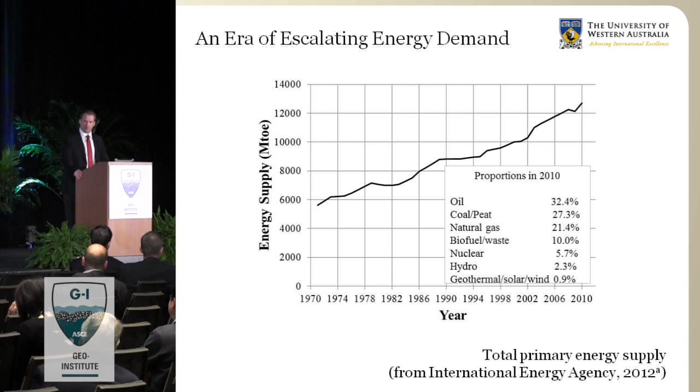So today's talk, in light of this increasing demand of energy, my co-authors and I looked at 3 areas which are changing geotechnical engineering practice. They're in ultra deep water—we're moving into, or have moved into, water depths greater than 1,000 metres for oil and gas developments, into new regions. The one I'm going to concentrate on is the one closer to my heart, around Australia and the Pacific, though the Arctic is, of course, another major development area for oil and gas.

Also, in a world of climate change, geotechnical engineers have opportunities to develop renewable energy solutions. This has been a great area of development in our profession in the last decade or so, and will, I think, increasingly be so into the future. So what I've done in this talk and in our paper is to take a very bird's eye view of these 3 issues and look at example challenges that this is giving our profession technically.

In this talk, not only will I give the bird's eye view, but I'll try to go through three specific examples where I show how we've actually implemented some technical change in these areas. Starting off in deep water.

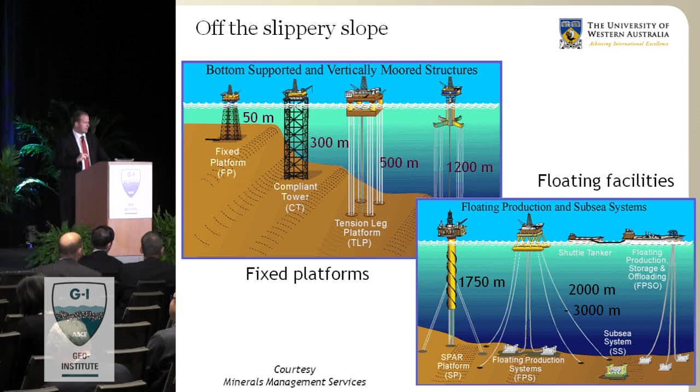As energy demand and resources have been depleted in shallow waters, the oil and gas industry has moved into deep waters off the continental shelf, into water depths now exceeding 3,000 meters, here in the Gulf of Mexico and places like Brazil. That's changed the type of structures we've been building, from fixed platforms with rigid connections through truss-work legs down to the seabed, using traditional piling methods, through to now in deep water where we have floating facilities moored with large anchors, with pipelines linking the reservoir to manifolds and rising up to the floating system.

The left-hand slide here is a schematic of a development now in Australia. The Gorgon development is off the continental shelf in 1,300 metres water depth. This shows examples of what we need to design now, including mud mats to hold the pipeline systems in very deep water — these are like shallow foundations in very soft soils.

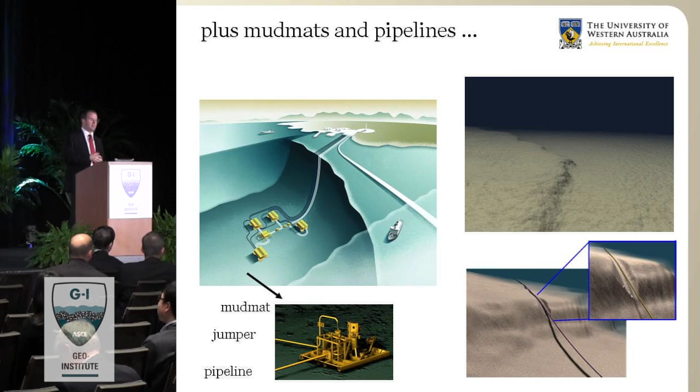The pipelines themselves, as the gas turns on and off, heat up and cool down, expand and contract, and that moves these manifolds around. So we're now moving into a regime where you're actually designing things to move, more so than just designing things to stay fixed.

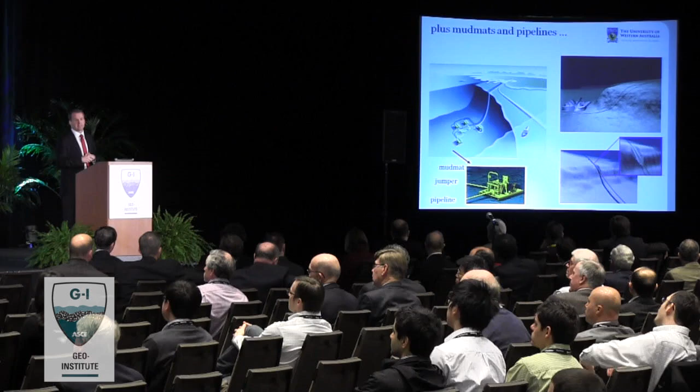Another example of a moving-type design recently done in Australia is shown on the right-hand side — the Sydney Opera House, to show the scale of a pipeline that had to come up the continental shelf for the Gorgon development, spanning a couple hundred metres. How do you design that pipeline as it's bouncing around the seabed?

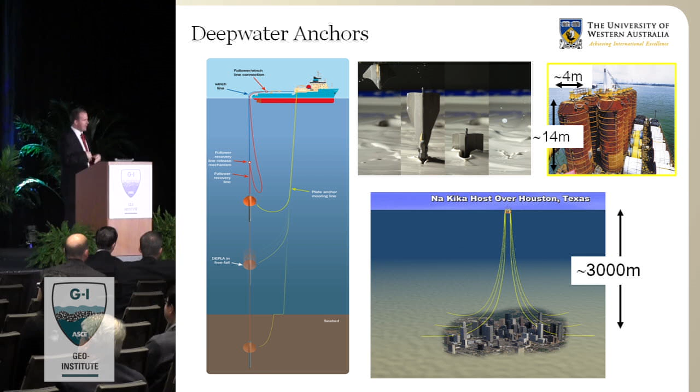Deep water has also brought up lots of different anchoring solutions and innovations, from suction caissons, through to the example I'll show — plate anchors — to drop anchors. It's like playing darts with the seabed: you drop a big dart down, let it flow through the water and penetrate the soil. Great challenges exist in how far it will penetrate, how it mixes and infuses with the water as it does that, changing the soil properties, and what its capacity is afterwards.

Looking at the challenges: the environment is characterised by very soft soils, normally consolidated or lightly over-consolidated. In all offshore work there are great costs in site investigation, particularly in deep water, where one is very interested in anisotropy, degradation with cyclic loading, and increasingly focused on just the top few metres of soil. How do we characterise just the top metres of a very soft sediment?

There's a movement away from traditionally designing for keeping things stable and still, to having to design things that are mobile — and therefore we get large deformations. How do we analyse that? Even changes in seabed topography occur; we've got pipelines that slide back and forth, ploughing up the seabed. How do we design for that type of movement? Cyclic loading, and now increasingly a focus on stiffness, not just on capacity.

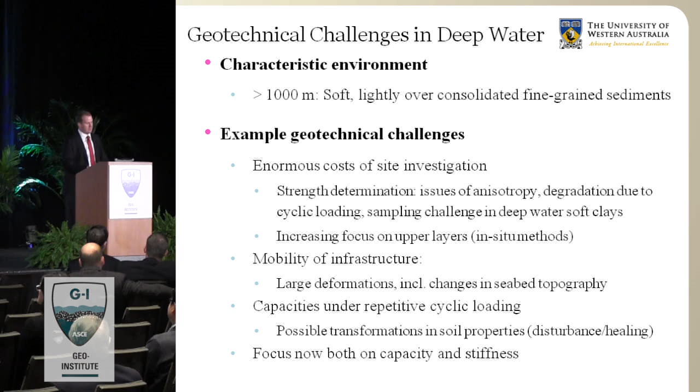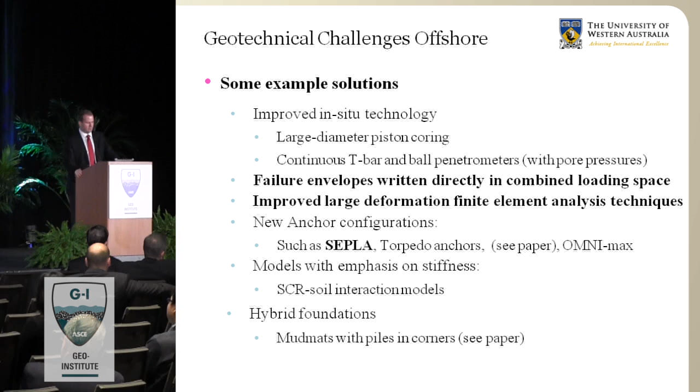There's also been a strong movement in the offshore industry towards writing failure envelopes for combined loading directly in terms of the loads applied — vertical, horizontal, and moment — throwing away the inclination factors and shape factors traditionally taught in geotechnics, because they're more accurate and, as I'll show, can be put together in plasticity models to look at displacements as well. I'm going to show that for the SEPLA anchor, which I'll describe in a minute.

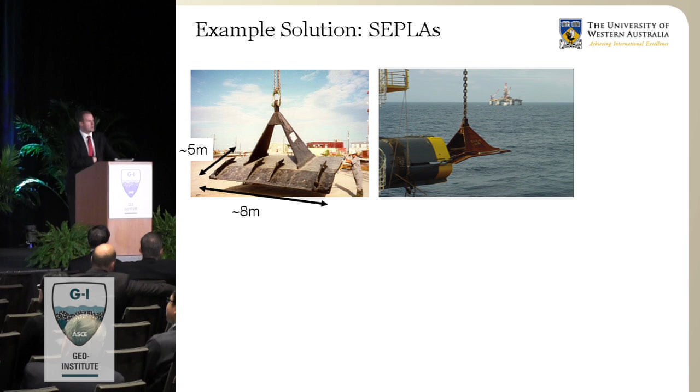So here's a SEPLA, a plate anchor, which they insert in the bottom tip of a suction caisson. They install the caisson, put a suction pump at the top, and it sucks itself into the ground, which delivers the plate anchor to a certain depth, but unfortunately delivers it in a vertical plane.

They then pull the mooring line up, which rotates the anchor around until it becomes more normal to that mooring line. That's called the keying process. When it does that, it actually moves itself up and rotates around.

That loss of embedment is very important for the industry because deep water sediments have increasing strength with depth. If you lose too much embedment, or you don't know what that embedment loss will be, you don't know how to predict what the capacity of the anchor eventually will be.

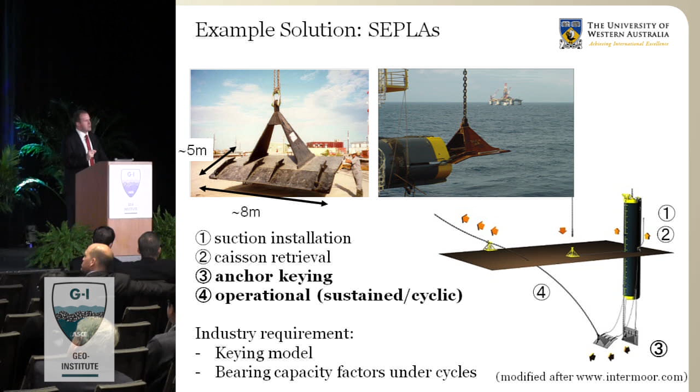So there's been an industry requirement to come up with better keying models and to determine how far it will move up. And then further on, once you've got it in operation and you're sustaining it or cyclically loading that anchor, say in a big storm, what sort of load can it sustain?

So we did a big project for ExxonMobil out of Houston, and in coming up with this model for keying, we developed what I call a force resultant model. The key here is it's like all plasticity.

What we try to do in this case is write a yield surface for the anchor directly in terms of the loads applied. The way we do that is, in this case, we did a 3D finite element analysis. You can see inside that green mesh is a shank and a fluke of the SEPLA anchor. In the finite element, you can move the anchor down or sideways or rotate it, or do all combinations of that.

And you get different load paths, which are shown here on the blue lines. They're the load paths up till failure, and the dot's the failure point in a numerical analysis. We can then join all those failure points together and define a yield surface, or an ultimate capacity surface, for that embedment directly. That's what it would look like, and we can put a formula to it.

And there are the bearing capacity factors uniaxially for that anchor itself. So that more accurately defines what the capacity is there.

But in this case, we want to see what the movement is going to be. So we have to assume some sort of flow rule. In this case, we're assuming associated flow.

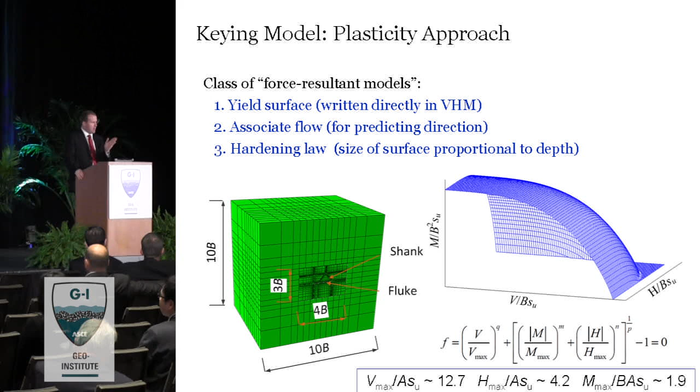So the movement, once it's onto that capacity surface, will be normal to the surface itself, and has some sort of hardening - i.e. the surface shrinks as it comes up with lower shear strength, and increases in size with higher shear strength, remembering that's an increasing strength with depth profile.

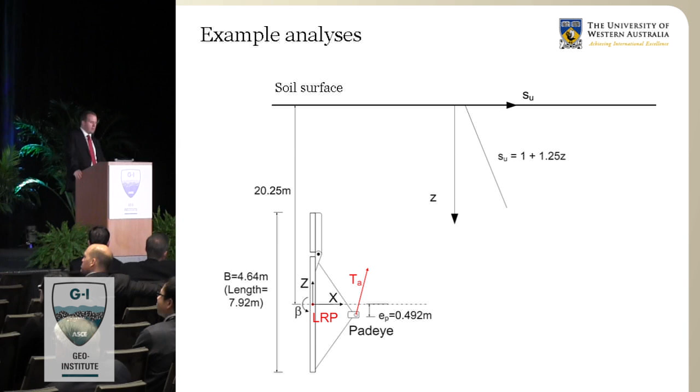In the end, we can put it together in a model using a simple spreadsheet type approach. Here's an example: it's a 20-metre embedded SEPLA anchor being pulled with that load TA, from the chain, with an increasing strength with depth profile. We're basically trying, at each step, to predict where this will move to.

So here are some example results for an anchor that's being pulled at 90 degrees up by the chain. It sort of moves itself around in horizontal. So here's the horizontal vertical displacement.

So it moves itself up and around as it twists into position until it's finally twisted all the way. It's even rotated a bit further here because the offset was not in the middle of the anchor, to about, I think, 11 degrees off that offset, until you get no more rotation of the anchor. So you can believe it's fully keyed in.

At that stage, it will just start to pull itself out. And so this type of modelling can give you a good prediction of that type of keying behaviour.

On the right-hand side is the normalised chain load against that loss of embedment. One can see that at the current depth, so that's if you normalise by wherever the anchor is as it's coming up, one sees a bearing capacity factor a bit over 12. Remember it was 12.7 for just pure vertical load - it's a bit less than that because it's still got some horizontal load as it's pulling out.

However, if you normalise by where the undrained shear strength was at the embedment that the SEPLA was, you're getting about a loss of about 20% in capacity. And that's the sort of figure that's really important for the designers to know.

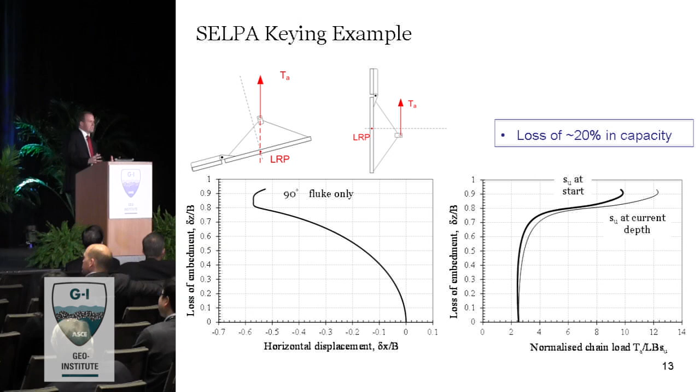In this modelling, we could look at different angles. Here's something at 40 degrees, which is more realistic for the type of application this anchor would have, and with different configurations of shank.

In this project, we could show that the loss of embedment for most conditions was between 0.5 and 0.9 widths. We also did experiments where, if you installed the anchor, took away the caisson, and let some reconsolidation occur—waiting for the excess pore pressures to dissipate—you could reduce this loss, obviously because you're getting increasing strength.

Interestingly, part of this project is that we worked out that this design of the anchor was completely wrong. It has this flap you can see on it, and the idea of the flap was that it was supposed to, as it was keying, open up to stop the keying—to give more horizontal resistance and stop it sliding upwards—and then close once it had been keyed into position for full capacity.

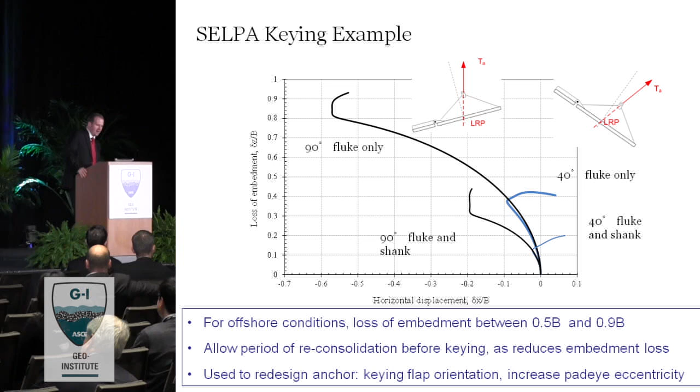Unfortunately for them, it did completely the opposite. It stayed closed when it was keying up, and then opened up when it was trying to be in operation. They just basically had the hinge on the wrong side. So by investigating the mechanisms that were occurring, we could show this to the designers and change the anchor design.

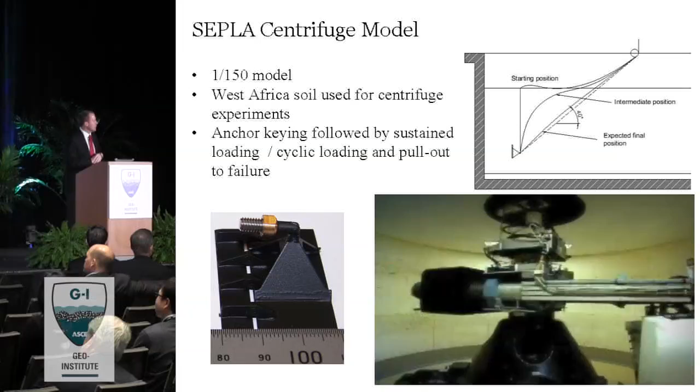Going on to operational issues, the little movie here is our beam centrifuge at UWA. For those who maybe haven't been exposed to the centrifuge, we spin soil at large accelerations. The idea is that soil is a frictional material, and to get the scaling between a small-scale model and the larger prototype offshore, you need to accelerate gravity to make sure the stresses occurring under the model are scalable.

In this case, we were spinning at 150 times gravity, so we could shrink our 8 meter by 5 meter SEPLA down to the one you see on the left-hand side, a 1 in 150th scale model. We're using West African soils that have been collected off Angola.

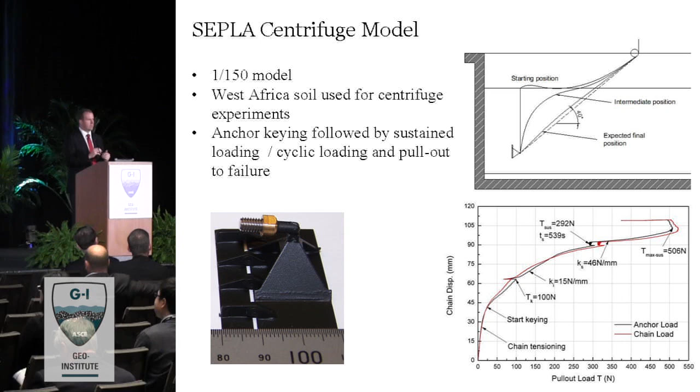We hold that load, and then we let the pore pressures dissipate. We're measuring that to either 50% or fully dissipate, and then we pull it out to see what increasing strength we get, or whether we can just continue to hold that load.

Here's the summary of this type of result. On the x-axis, this is the sustained loading against the maximum monotonic pull-out at a certain rate. So if you took the 60% case, you're holding it at 60%, and letting it dissipate by 50% of the excess pore pressures, we could have an increasing capacity of 20%. At 100%, it was 1.6, so a 60% increase.

At 70% you get increasing capacity. However, there is a threshold you can push this to, where basically if you try to push your luck too much under sustained loading, you actually pull your anchor out.

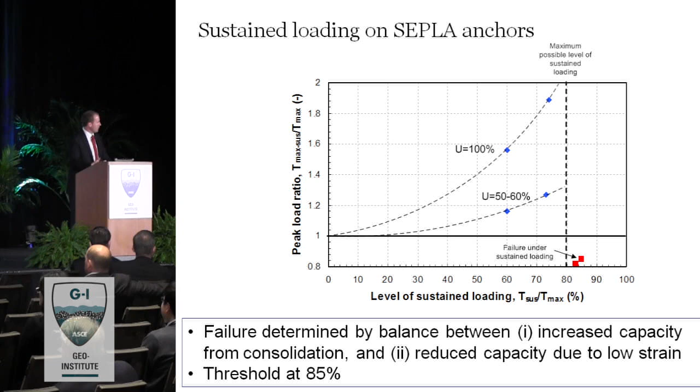This is because the failure is determined by a balance between the increasing capacity you're getting under consolidation—as the excess pore pressures dissipate, getting consolidation in front of the anchor increases capacity—but you're also getting a reduction in capacity because it's slowly pulling itself out under that consolidation. Because the rate is slower, the strength of the soil is less, so you can reach the case where it just slowly pulls itself out rather than sustaining consolidation in front of it. That happened for these soils and this anchor at about 85%.

Cyclic loading, the same processes are occurring. You're getting consolidation in front, but the level which you can go at is lower, about 75%. So the left-hand slide shows you could actually cycle up to about 0.75 of that monotonic capacity, and it would be able to hold itself over repetitive cycles. However, if you went above that, the cyclic loading was doing more damage to the soil, and you couldn't hold it. You could see on the right-hand side, it's just pulling itself out.

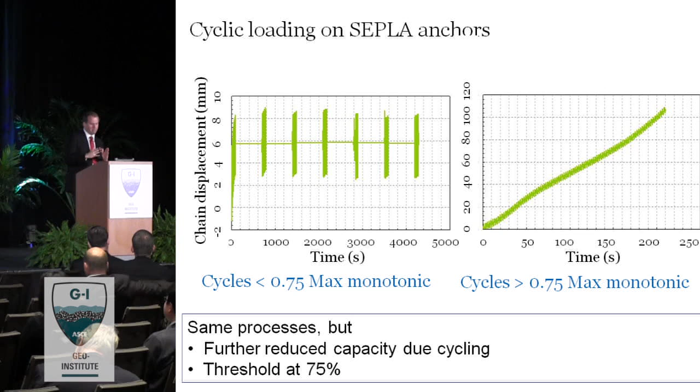These were important for the Exxon engineers as they wanted to come up with a design methodology for using these type of anchors for permanent installations. The reason is that they basically take vertical load very well, so you can put a taut mooring in. The angle up to the floating platform can be at about 40 degrees, giving a much lower footprint and much greater advantage for your development.

For this example in Deepwater, I'd like to move to new regions, and I'm going to concentrate on Asia and the Pacific. This might scare Bill a little bit, but this is a slide I use a lot in Australia to show that our region has a lot of untapped gas that is uneconomical to develop with technology at the moment.

This slide shows that the solid graphs here are where it's economic to develop oil and gas. You can see the Gulf of Mexico is mostly filled, whereas the shaded areas are where it's still uneconomical with existing technology development. You can see there's a very large red section, which is untapped gas or stranded gas in Australia.

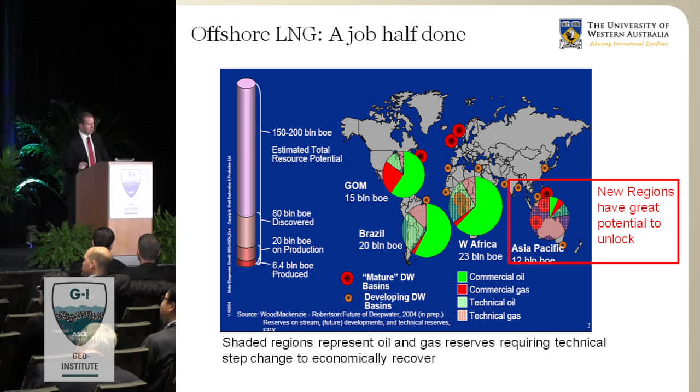If you look at our region of Australia and Asia, we have very stratified seabeds, carbonates, sensitive silts, and this is the genesis of why we've got a research group out in Perth. Things like understanding drainage conditions, rate effects, compressibility, cementation - these all caused problems when they tried to pile the Rankin A and the Goodwyn in the 80s and 90s in Australia.

The other challenge is that we're very remote with very long distances. For instance, we've got a pipeline that's going to be over 500 kilometres in length in Australia at $4.5 million per kilometre, so you've got a lot of potential to make savings as a geotechnical engineer. We also have very layered conditions, and installing platforms, as I'll show, in those layered conditions can be very difficult.

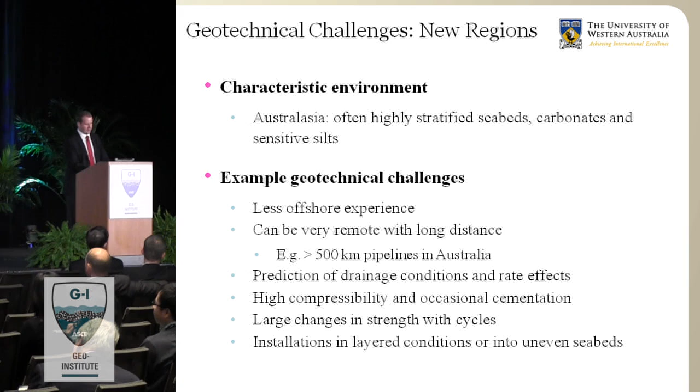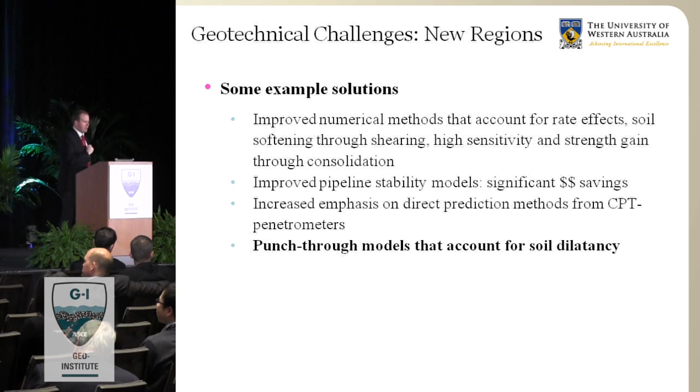Some solutions are improved numerical methods for rate effects, for soil softening, including sensitivity and softening in our type of modelling. Again, I've shown an example of strength through consolidation. Pipeline modelling has become quite important, and we've had significant savings. There's also been an emphasis on more direct predictions using in situ CPTs and other devices directly into design. The example I'm going to look at is punch-through modelling for mobile drilling platforms.

But before I do that, this wasn't in the paper, but I thought it was important to come to America and maybe describe this. This is a really new development in the Australian industry, and it's got interesting sustainability questions, which I hopefully can add something to this discussion.

As I showed in the first slide, the traditional way of developing gas is to have a floating platform or just have a pipeline that imports it back to shore, where you'll put a processing plant - basically a big refrigerator - to liquefy it and then put it on a ship to export or put in a pipeline. Most of Australia is exporting in ships.

However, this development's called Prelude. It's just been built, hasn't been placed in position yet. The bottom left-hand side shows it in the shipyards in Korea. The idea is that they're going to do all this refrigeration offshore - it's a big boat that does all the processing offshore. You don't need a pipeline to go back to shore, you don't need a processing plant onshore. It's causing a lot of controversy in Australia for very interesting sustainability reasons.

Before I discuss that, some statistics: it's 488 metres in length - that's about 4 football fields - 70 metres in width. It weighs 600,000 tonnes. If you've ever seen an aircraft carrier - we don't have any in Australia, but yours - that's 6 aircraft carriers in weight. It's a massive ship being developed for this, and it's going to be moored for 25 years.

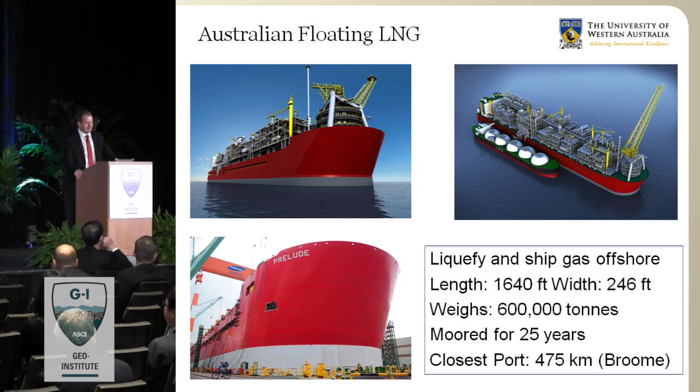So there's been a bit of controversy over whether we're continuing to maintain very, very poor conditions for our Aboriginal people by not allowing some of these developments to come on shore, and just allowing them to be big vacuum cleaners. Maybe on the environmental positive side, however, after 25 years you can take it somewhere else and continue to go, so you don't need to rebuild the ship. Okay, that's my aside on floating LNG, which you'll, I think, see a lot more of in the future.

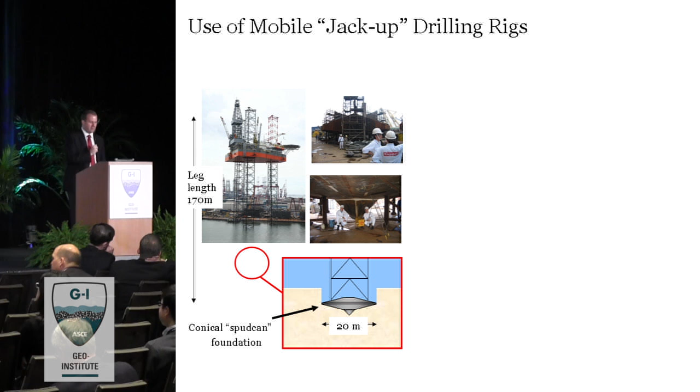The example I wanted to show in the geotechnics here is mobile drilling rigs. How do we install drilling rigs that do the majority of the drilling for oil in water depths up to about 120 metres? Here you can see they're a very slender platform. Leg lengths can be about 170 metres. They've got what are called spudcans, a 20-metre diameter footing underneath. These need to be pushed into the seabed as we raise the hull up off the water.

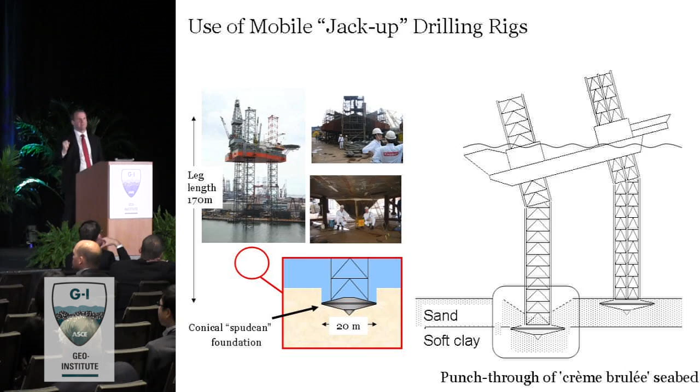This is going to be a very tricky operation, particularly when you've got layered soils, a strong soil over a soft soil. One can get what's called a punch-through failure, where you actually punch the stronger soil into the softer soil. It reduces the load, and because you're holding the hull up above the water, it's like removing one leg of a bar stool you're trying to sit on. You can get these types of problems occurring: bent legs, and even collapse of platforms. The industry is still seeing 1 or 2 of these types of punch-throughs per year, particularly in new regions.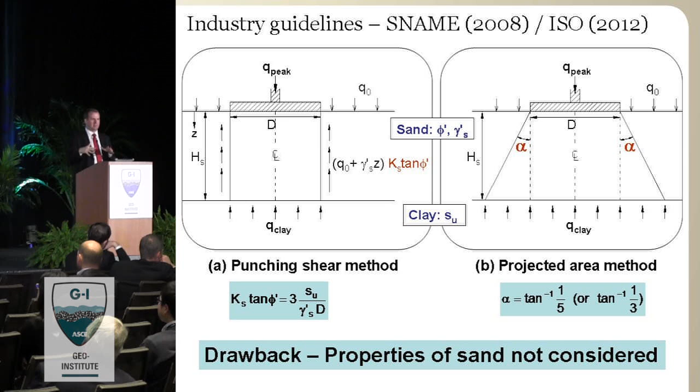The other option they give in the guideline is to do a projected area, where you don't account for the sand at all. You just say it's going to project down to the clay layer to a bigger footing below, and if you project it 1 to 3 or 1 to 5, you can get a good prediction of what the peak load at punch-through will be.

Here's a little model of what we did to actually show what the mechanisms are. This is half a spud can up against a transparent window in the centrifuge at 200 G, taking lots of photos. On the right-hand side is the actual loads we recorded and the mechanisms that are occurring at any time. About now was the punch-through failure, you can see, and that's the middle mechanism there.

It's like a frustum of sand which is being pushed down into the clay. It's got a sort of an inverted trumpet-type shape in that push-out. As you go below into the clay layer, you can see you're actually bringing a lot of sand down with you, and you have a much larger footing in that clay layer below.

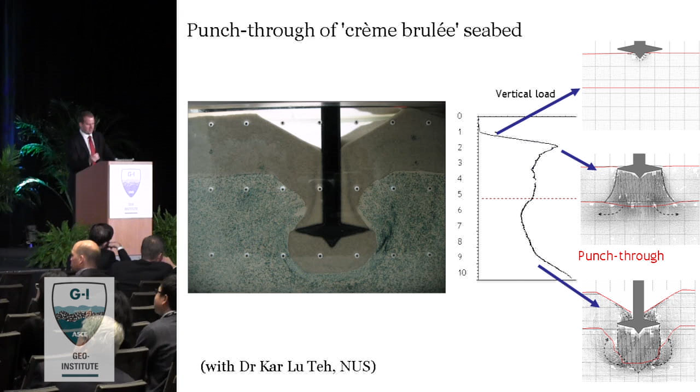So if you want to predict what the capacity in the clay is, you need to account for the fact you've got this much bigger footing than what you thought you had, which again is not actually accounted for in the design guidelines. And that say is a punch-through. So that would be 8 metres of where you've got less load than you had at the top of the punch-through event. But I'm going to concentrate on trying to predict that peak. So that's the visualization of what the mechanism is.

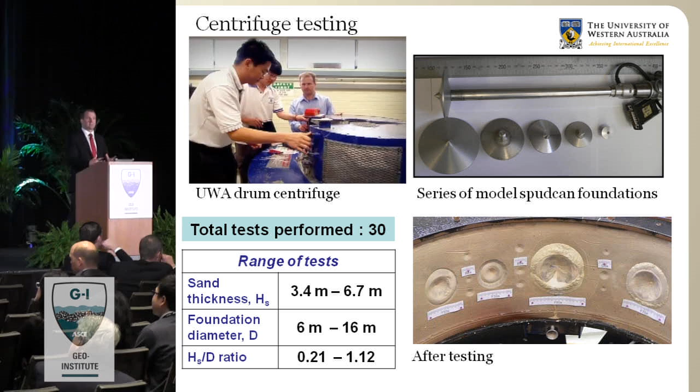We also did a very large series of centrifuge tests where we take the whole spud can and penetrate it here. Our top left-hand side here is our drum centrifuge, which is like a big washing machine where the soil goes all around the outside channel. So it's very good for these comparative type tests.

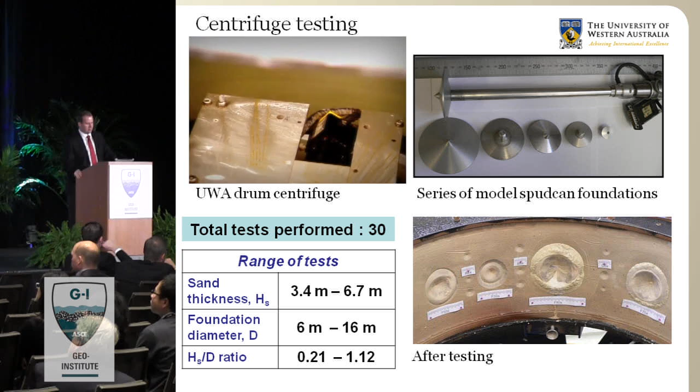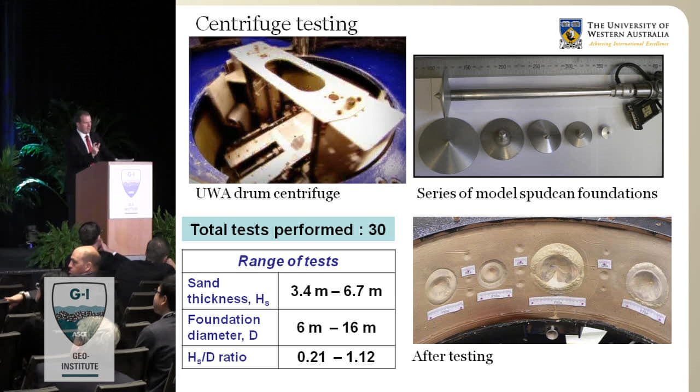So here we changed the height of the sand layer and also the diameter, and you can see in that picture there different diameters of spud cans. What we're trying to do is change the ratio of the height of the sand layer to the diameter of the footing. Here are just some example results.

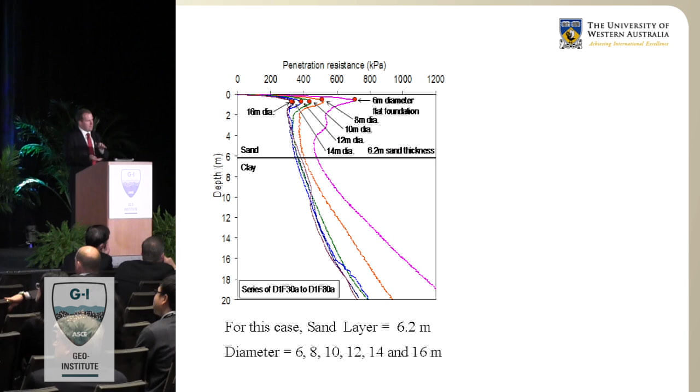Of course, as the diameter of the footing got bigger, the height of the layer to the diameter decreases, and you get less of a peak that's occurring. The pressure that's needed is reduced. And just when we put all the results together with different sand layers, you can see we get a very consistent set of results for 30 or so tests.

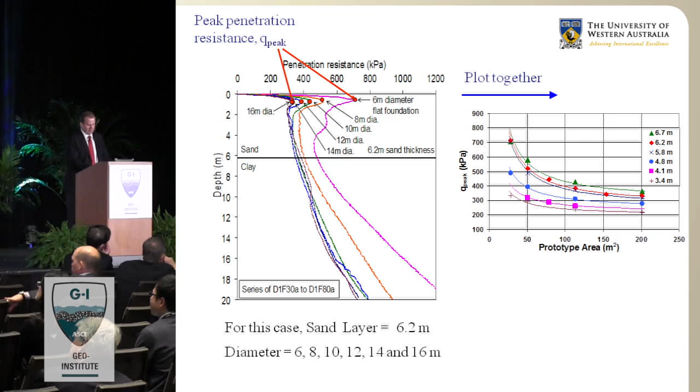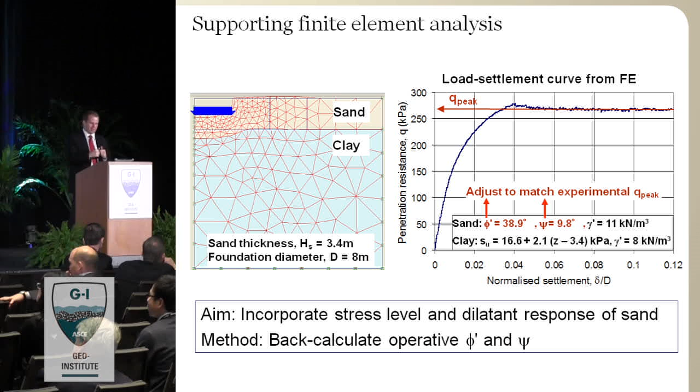And that's what this is showing here. So that's the match for one particular case. It's sort of useful. You could do that for each of them, but it doesn't help you too much.

What we eventually did was to bastardize the Bolton equations. If you see in Geotechnique in 1986, Malcolm Bolton comes up with relationships to relate the dilation angle, 0.8 of the dilation angle is the difference of the operational friction angle and the critical state friction angle. For those who know those equations well, you'll see that we've replaced the natural log of P dash with the Q peak here. So we're replacing it with what's the stress under the footing. That's why we're bastardizing it.

But what we have here is a relationship that can relate the peak stress that's occurring with a prediction of the operational friction angle and the dilation angle. And so when you try to fit, the graph on the left-hand side here shows the Q peak from the centrifuge tests against the Q peak from the FE analysis. And you pretty much are within 10% most of the time or 20% right.

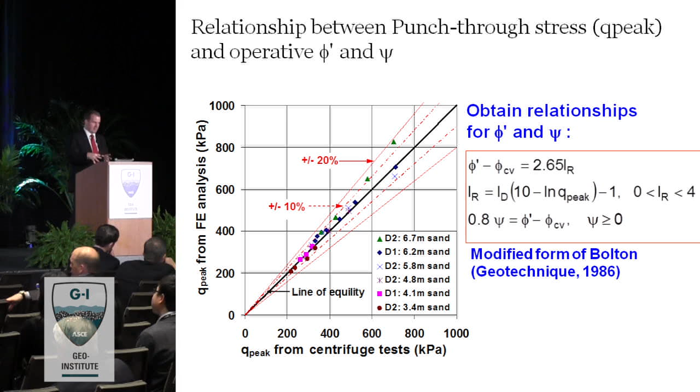It's quite nice that we've now got some formulas to try to tell for these sort of punch-through conditions what the friction angle and the dilation angle underneath the footing are. And if you looked at the mechanism of failure from the FE, it's at about what that dilation angle would be. I'm just showing one example here. And that was also very consistent with the PIV, that even though it was a bit trumpeted, it tended to be when you had high stress, it's more vertical, no dilation. When you had less stress, it's about where the dilation angle would have been from these sort of predictions.

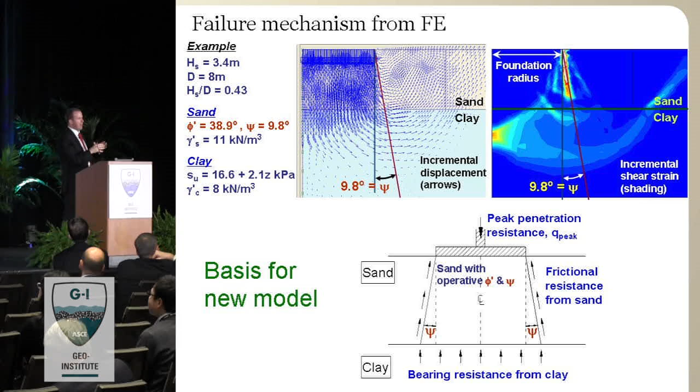So what we've done as the new model, it looks very much like the Hanna-Meyerhof and the punching shear. It's a mechanism, it's a friction resistance from the sand at an angle which is the dilation angle out from underneath the footing, plus the bearing resistance in the clay below. So you need to add the two up to get the prediction of the peak.

Won't go through this in any detail, but basically it's a silo analysis. You take infinitesimal thin horizontal disks through that thickness of sand, and you can set up a differential equation of the vertical stress. So you take the stress at the top, stress at the bottom, and the friction along the sides.

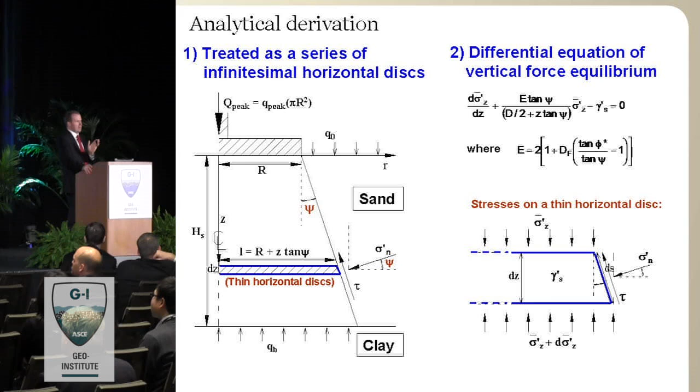Again, the problem here is you don't really know what this friction along the sides is, or even what the normal stress is. So in the formula, we fudge this with a fudge factor - we openly admit that. The dF in that equation is just a ratio of what the vertical stress would be at any point compared to the stress at the side, and we had to backfit that against experimental data to know what that should be.

Anyway, you can integrate that equation over the whole thickness of sand, and you get what looks like a very complex equation. But when you break it down, it's sort of simple. It's the bearing capacity - the first term is the bearing capacity of the clay, and below we have bearing capacity factors for that. The second term in that first bit of the equation is the resistance of the sand at the sides, and the big term is actually the weight of the soil itself.

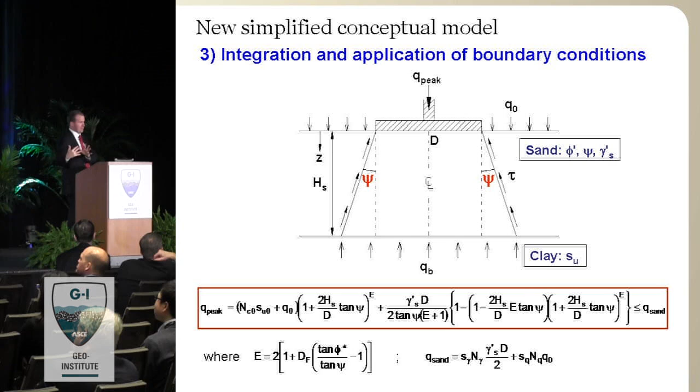The more take-home message from that is that we now have a model where you can get all the parameters from very simple site investigation. It's important for offshore - you account for the behaviour of the sand itself.

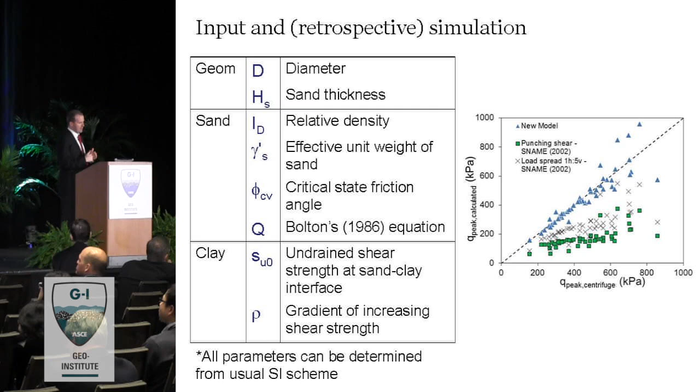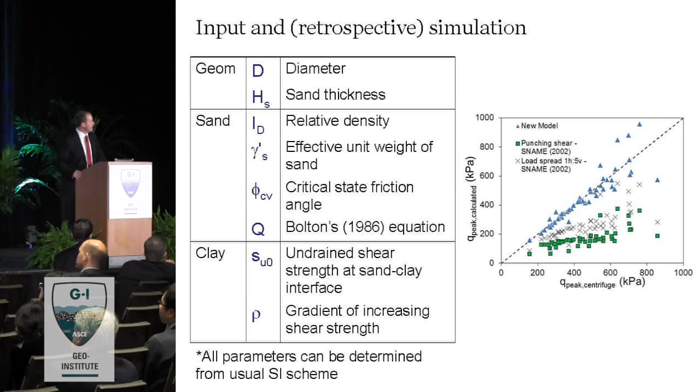If you look at this chart, okay, we're cheating because half of these dots are the model we calibrated for, half are just other experiments from around the world and in our own centrifuge. But you can see you get a better match between our calculated model and our centrifuge model, which are the blue triangles. The squares and the crosses are actually the SNAME, the current guideline methods, which always tend to be under-predicting what the capacity is. And that's sort of a very known thing around the offshore industry, that these methods do that.

How am I going, Tom? 5 minutes? Okay.

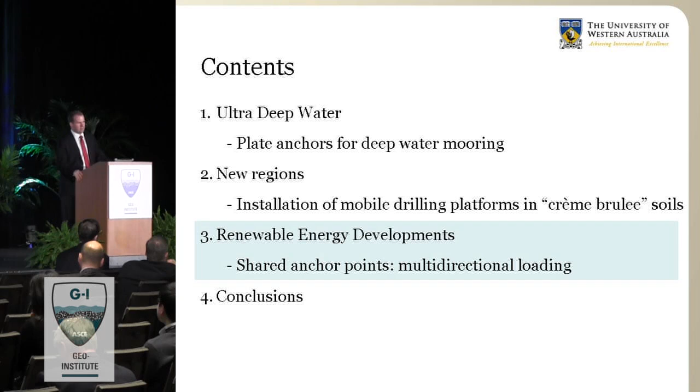The last area is renewable energy developments, and it's possibly where in sustainability we can make the greatest contribution technically as geotechnical engineers. Most of the developments in Europe at the moment are using monopiles to develop the wind farm. I believe that if the UK wants to reach its targets, it needs to build another 6,000 of these before 2020, which is very ambitious itself.

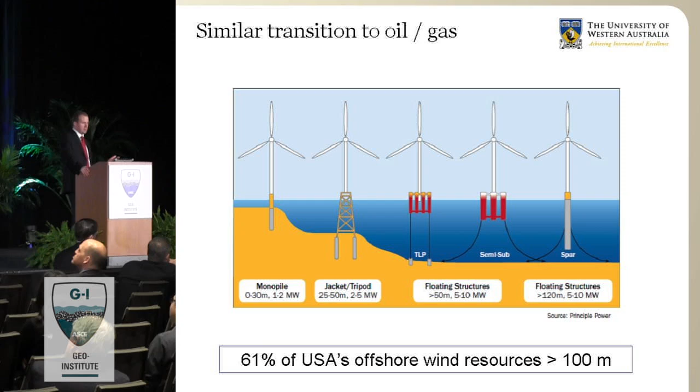But again, most of it is using this type of monopile design. As you go to deeper waters, there'll be a trend, like there has been in the offshore industry, to go into floating systems. There's a real chance, I think, for engineers to come up with cheaper foundation solutions to make this more economical, noting that even for the shallower waters, all of these developments have been government subsidised to make them economical. Also, 61% of the USA's offshore wind resources are in greater than 100-metre water depths, so coming up with a floating system maybe is where we could put in some research effort.

Some of the challenges here are that we've got a very large site to characterise. In offshore oil and gas, you have one particular site, one very expensive platform to put in. Here we have thousands of very cheap platforms to want to put in over a very long site, and there's a real need and a real desire to have much cheaper site investigation to do that.

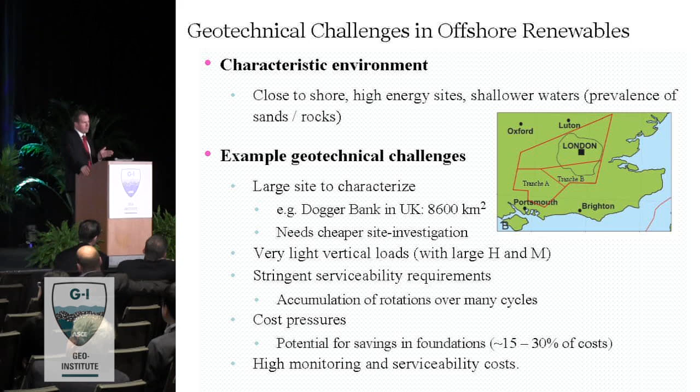Dogger Bank's in the UK, and that's the picture of how big that site is compared to, say - you can see it's much bigger than the City of London. I tried to put that in the US context, and I believe it's 1.5 times the state of Delaware, but I believe Delaware's not very big, so maybe that's not a great analogy. Anyway, there's a need for cheaper site investigation and also linking with geophysics to be able to bring costs down.

The other massive challenge for renewables is that you've got a very light structure.

Rather than oil and gas, you've got a very heavy structure. Here you've got a very light structure which has very large overturning moment and horizontal loads, and not only that, very stringent serviceability requirements. For instance, over its lifetime, you can't see much rotation of the turbine itself, less than 1 degree. So accounting for cyclic loading, where it's hundreds of thousands of cycles, and how much accumulated rotation you get, is a huge geotechnical challenge.

But the good message here is that the costs of these foundations can be 15, 30, even up to 40% of the total cost of the turbine installation, the whole project itself. And therefore, there's much potential for geotechnical engineers to make a difference and make these economical to develop.

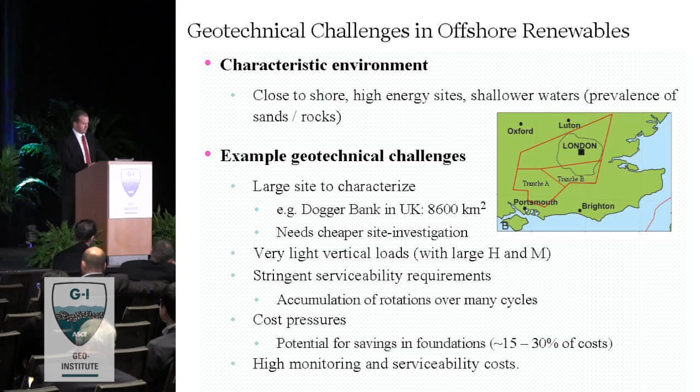Some solutions have come from the oil and gas industry, though in the paper we also make the point that that can also be hindering these developments because of the differences that are occurring between them. So they basically used the knowledge to date, but this is also hindering, I think, some further development.

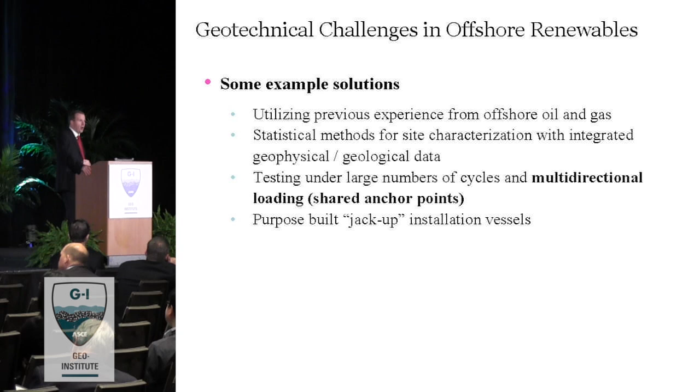There's been some very nice work on statistical methods for site characterization. Very good testing for a large number of cycles, particularly at Oxford University, where they've now got nice methods to predict accumulated rotation over tens of thousands of cycles. In bold, I think there's a large future in multi-directional loading for shared anchor points, which I'll talk about.

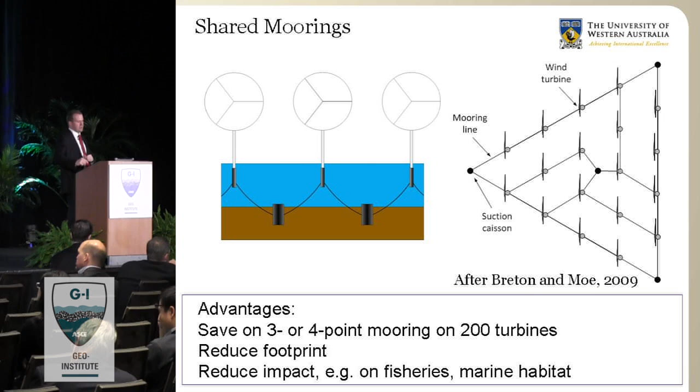What I mean there is that if you were to build floating turbines in more than, say, a traditional 3 or 4 point mooring system, you can already see that for 200 turbines, you've got 800 anchor points that you need to put in. If one could get arrangements where you could share them - here's an example given in the literature by Breton and Moe - where if you link the turbines together and have common shared points, you can drastically reduce the costs, reduce the footprint, and reduce the impact on things like fisheries and marine habitat.

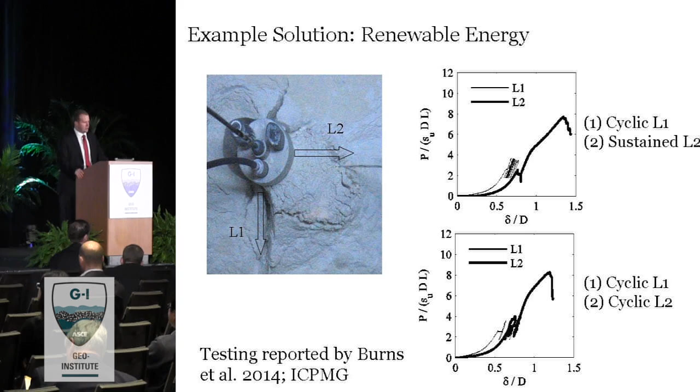But there's very little work in this multi-directional loading of caissons, and I think there's a great future in research in this area too, again trying to reduce the costs and bring these things to economical viability.

Conclusions. I suppose I threw out the challenge that we're still going to be in an era of escalating energy demand. And I would think that geotechnical engineers have a really strong role to play, and I hope I made that point to meet some of these challenges and to meet the challenges of sustainability as well. I broke it into 3 areas: deepwater, new development regions, and offshore renewables.

However, there's still many technical challenges, and if I could just summarize a few, we're getting what I'm calling geotechnical transformations - we used to be in design where things were static and stayed still, and we're now in the offshore looking at things that move a lot and go long distances, and that's taking new methods to try to design. A lot of cyclic loading problems still unsolved.

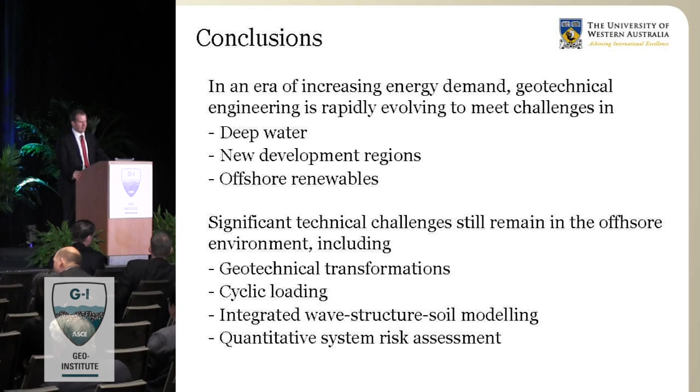Integrated wave structure soil modelling is a big issue, and you can see that if you wanted to get that multi-directional wind farm up and running, you've got integrated modelling that needs to be occurring between all of the different engineering types. And I'd also, though I haven't talked about it, put risk assessment into all of this as being quite important for driving down costs and making things more sustainable.